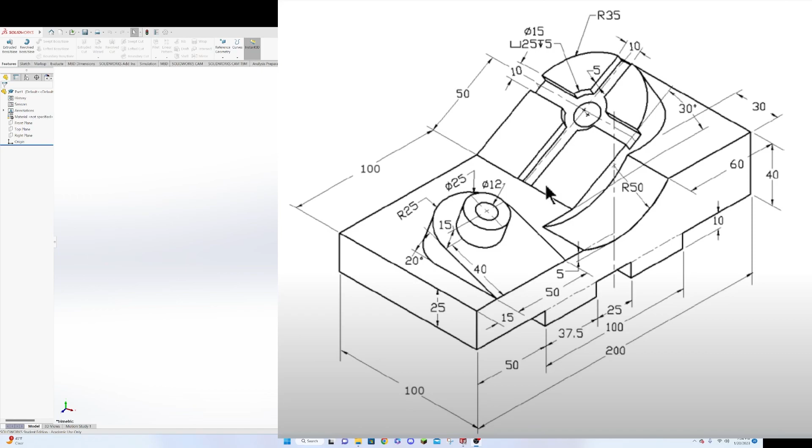What we will do here is draw this profile you can see on the side, and extrude the piece out to 100 millimeters. I'll shrink this down so you guys can see the SolidWorks, but leave it open on the screen so we can see the dimensions we're working on. I'll go to our right plane here, go normal to it, and then start a new sketch.

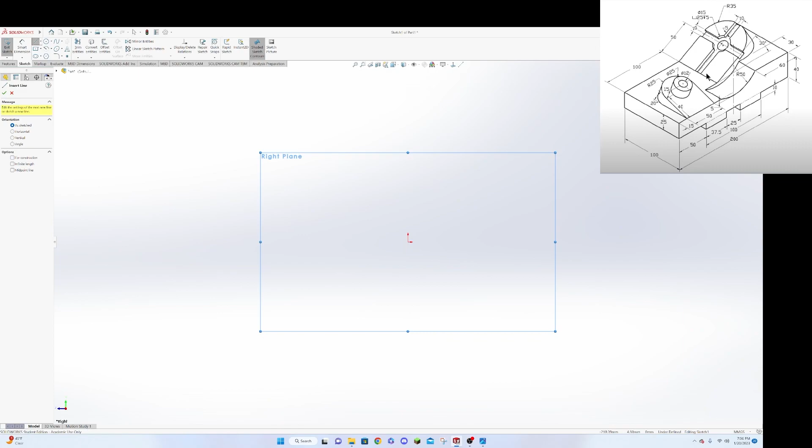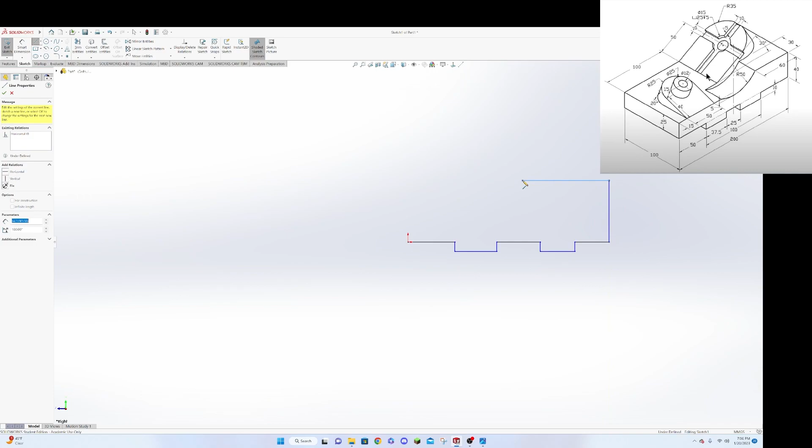We're going to use the line tool, and we'll just start in one of these corners here. If we look at our drawing, we have a total length of 200, and these little step downs here that are all the same height. So we'll start on the corner, draw over, drop down, over, up. Like I said, you don't have to be exact with this because we'll go in a second and give everything measurements. I'm going to go over to here, drop down at an angle here, come over. Make sure everything runs on horizontal and vertical lines so you're getting the indicators there - that will help you get a rough start of what you're looking at. Okay, so we've got that started.

So now let's go into our smart dimensions and start throwing some measurements on there. There's a few things we can do before that though. We can look at this drawing and see that each of these small legs is the same height - they're all 10 millimeters. And we can also see that all these lines, like the base of the object, are on the same plane, and the base of the two legs are all on the same plane.

So let's start by selecting these four little short legs. You've got to be careful here that you're selecting the lines and not the points, because if you select the points it will cause problems. Then we can click equal, and that makes all of those equal. So that's a good thing to start with. All right, so we've got that relationship going. We'll say okay, and then we can click this line here and hold Control and click that line there, and we have them horizontal - they're actually already horizontal to each other by default.

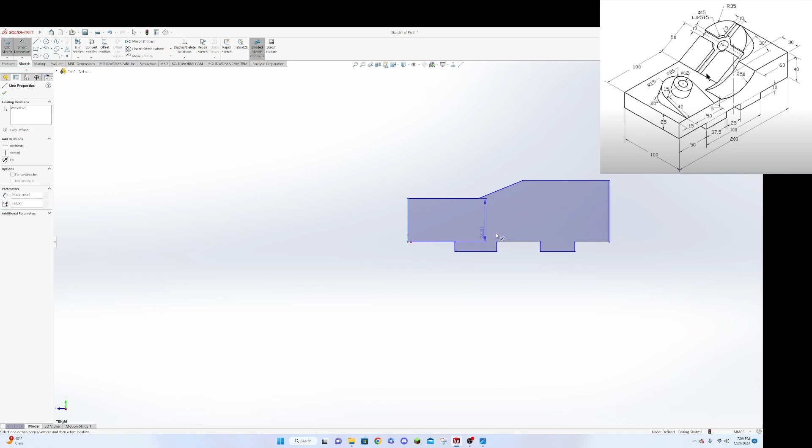I'm going to click on this line here, click on this line here, drop down, and say 200 millimeters. Then we can see that stretches us out, and it should give us a good representation now that we've changed this to 200, that everything else will kind of fall into its rough shape. We didn't draw everything exact, like I said, but things should be close now.

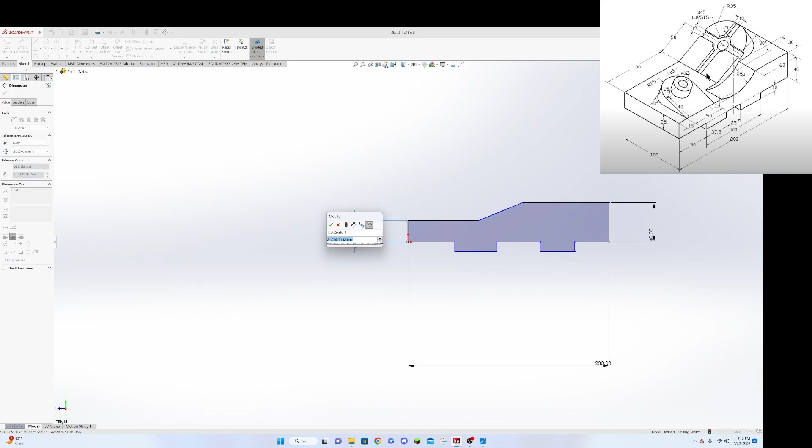So we have a height here of 40 millimeters, and we have a height here of 25 millimeters. Okay, so that gets us a little bit closer to where we need to be. We can see that this distance here is 100, and this distance here is 60.

All right, so that automatically creates this angle up here and gives us our top part done now. So now we have some distances on the bottom. This first one here is going to be 50. We know that the width of this piece is 37.5, so we say 37.5. And we know that the distance between these two pieces is 25.

And so then finally, we know that this one's going to be 37.5 just by doing the math on these. But what we'll do is use the measurement we're given, that from this line to this line we have 100. So we'll click on this line, click on the line there, drop down, and it's 100.

All right, so the only thing we're missing now, and the reason why this line is blue, is that we're missing our height for these legs. If we look at the drawing, we see the height for those legs is 10.

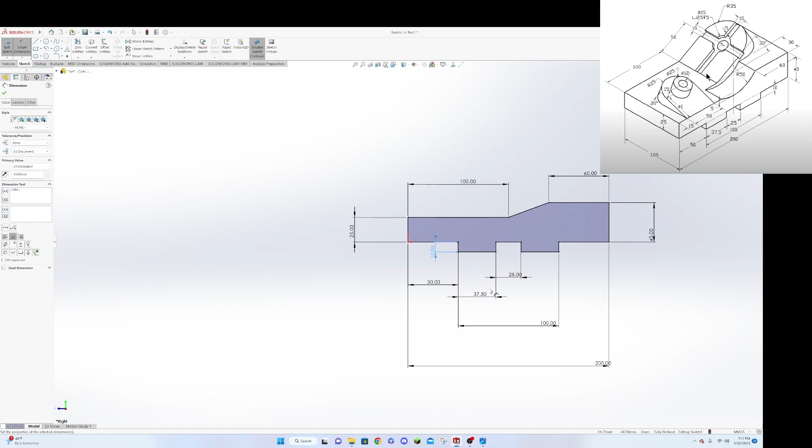Click on that, we say 10, we say okay, and you see that I did it for all of these lines because we told them that they're all equal. So there we go, now this is fully defined, it's all black lines all the way around, and we have our gray square. We can say okay.

Alright, now we want to go to features, we want to say extrude boss base, and let's flip it around so that we're extruding it backwards from this plane. Part of the reason why we're doing that is that you can see up here on the drawing that you have this cutout that comes off that face, this weird little cutout here.

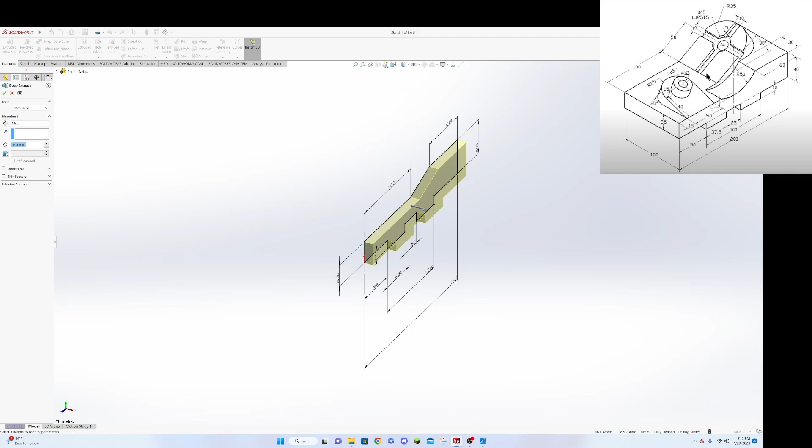So when we get to the point of doing this cutout, it will be easier if the object is running this way, away from the plane that we're going to draw on, because then we can draw this cutout onto this plane and just extrude cut backwards, versus trying to draw off of the face instead. We can just use the plane. So with that in mind, we're going to switch our direction that we're going to run.

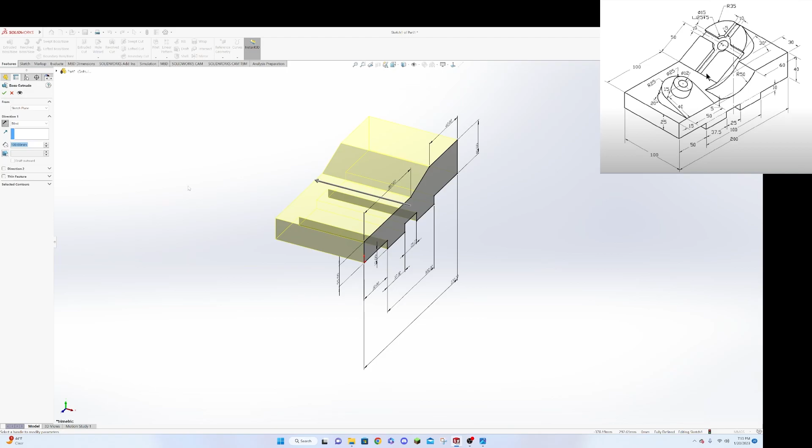So we click this button to flip it, and our width here we can see is 100, so now we're going to go to 100. Alrighty, so that gives us our rough shape here, and we can say okay. And you can see there we go, we have our rough shape.

So now that we've extruded this piece, the next step we'll do is the small angular piece on the skinnier part of the object, over here on the skinny part.

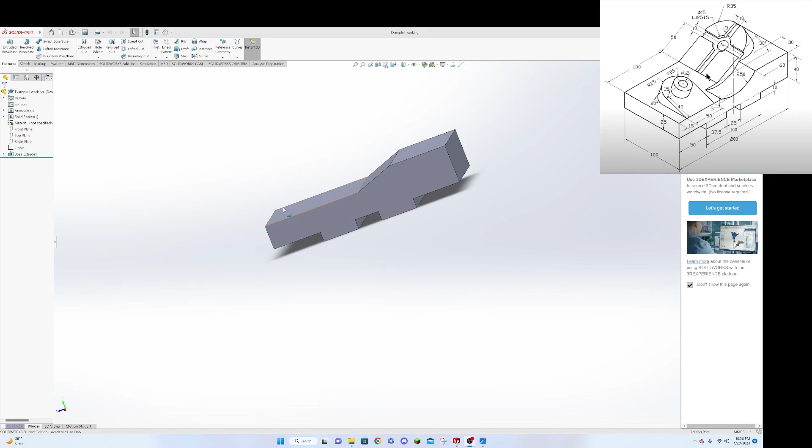So to do that, we need to make another plane here. We can look at the drawing and we can see that the face of that raised piece is at a 20-degree angle in relationship to this flat plane here, so to this plane here.

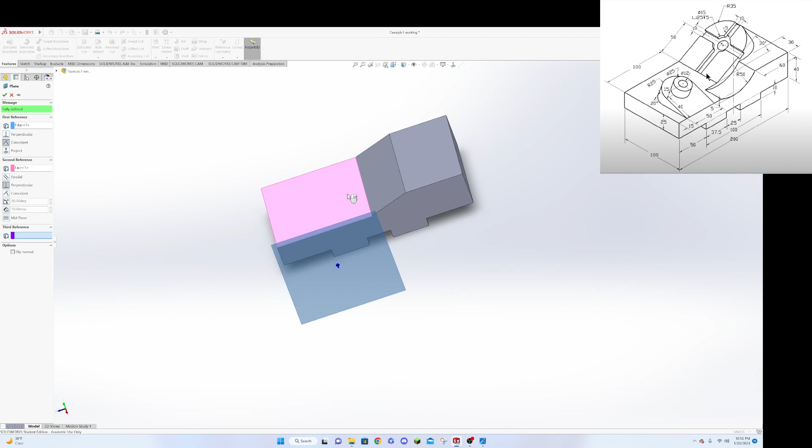So what we'll do is we'll go up and do reference geometry, click the drop down, choose plane. Now you're going to choose this edge as our edge to work off of, and then we're going to choose this as our reference plane. You can see what happens is you get kind of this new reference plane here.

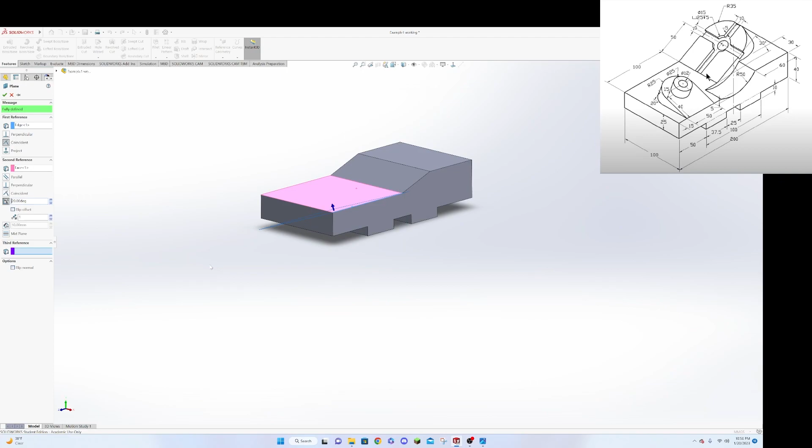Now what we want it to do is we want to make that at a 20-degree angle. So we'll click over here, and this brings up the degrees, and then we can type in 20. Now you can see that when we first do that, it gives us a 20-degree angle off of this face, but it's on the wrong side of the face. So we can flip offset, and that gives us a 20-degree angle now.

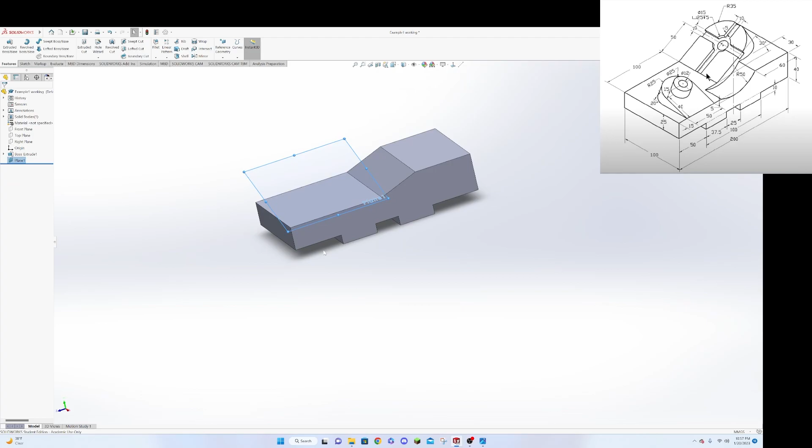And so now that will be our reference plane that we'll start our drawing with on here. So we say okay. Now we can go to that plane, right click on it and go normal to it, just like if it was any other plane. Right click on it again and start a new sketch.

So what we're going to do is draw the part of the extrusion that is the main base piece. So what we'll do is we'll get our line tool up here, and we will start on the surface here. One click.

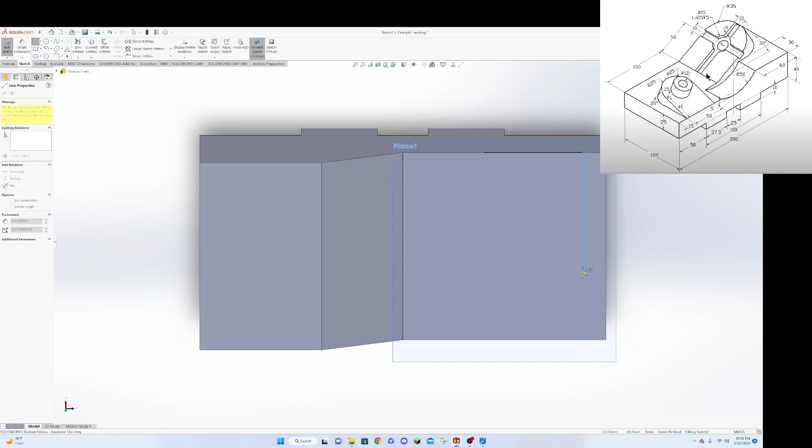Go over here, come up a ways, click, go away, and then come back to it. Remember, that gives us the arc tool, and it will let us know when we're lined up, right? We get those dotted lines that let us know we're lined up with both of those points. Click there, and then we can go forward and click up here, and we get our solid shaded area, which lets us know that's a piece that we can extrude.

Now we'll go to our smart dimensions, and we know that this distance here is 50. We know the distance from this line to this edge is 15. I've been having a thing where for whatever reason, my measurements are doing that weird scrolling thing.

All right, and then we know that our top radius, even though it should have that defined, actually I know what we're doing here. We need to define this distance. So the distance of this straight arm is 40.

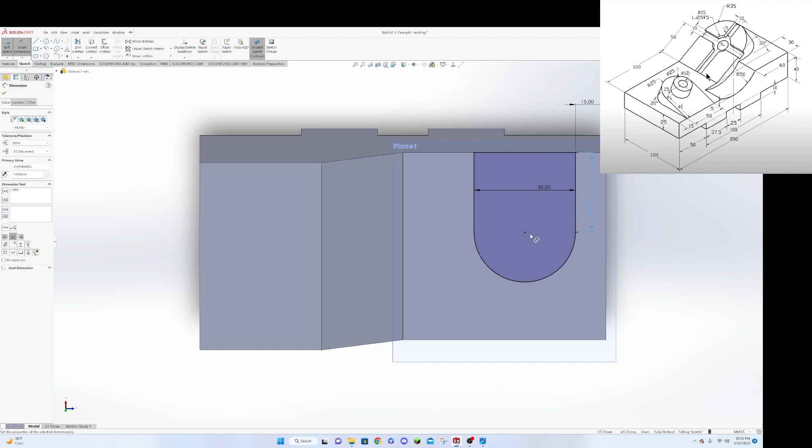All right, so now we have full black lines all the way around, so we know that we're fully defined. So what we can do now is click the check mark, and we can scroll this around. We've seen that it's not filled in, it's just drawn on this plane, right?

So we can go to Features and Extrude Boss Base, and we'll roll back around. You can see now we're extruding up in this direction. We don't want to extrude in that direction. We want to flip our direction, and we want to extrude down, up, basically up to surface. So we can say that here, and it's going to go in that direction until it hits the surface, and we say OK.

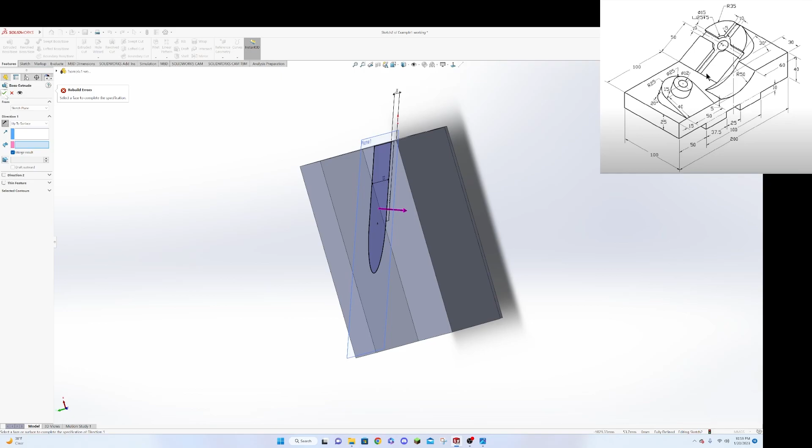Oh, we got to rebuild there. Oh, you need to pick the surface. Sorry. There you go. And now it fills it in. It shows that it's doing it. And then we say OK.

All right, so on this plane here, what we want to do is we're going to have two cuts. So we're going to have the pillar that we build up, and then we have the hole that we extrude out through it. We're just going to do it in 2 steps. It makes it a little easier.

So what we'll do is we have our sketch open here. We're going to draw our first circle. And it's got a diameter of 25, so we know its radius is 12.5. We say OK.

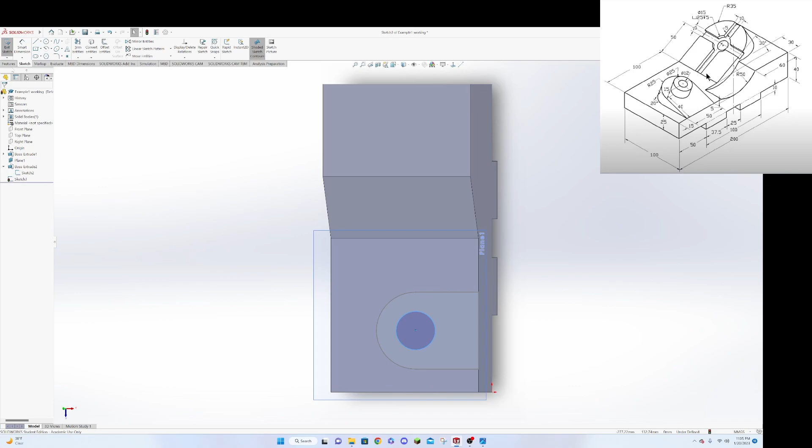And then we can go to Features and Extrude Boss Base. And we know that we want this to be 15. So we put 15 and say OK. And there we go.

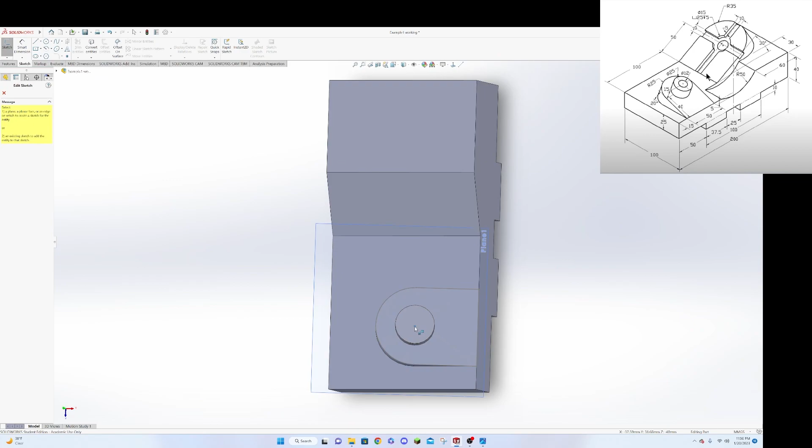And then we can go here and we can go to Sketch. We go here and we go New Sketch. And we can draw our circle here. Pull it out. And we see that our diameter is 12, so we'll make that 6. Say OK.

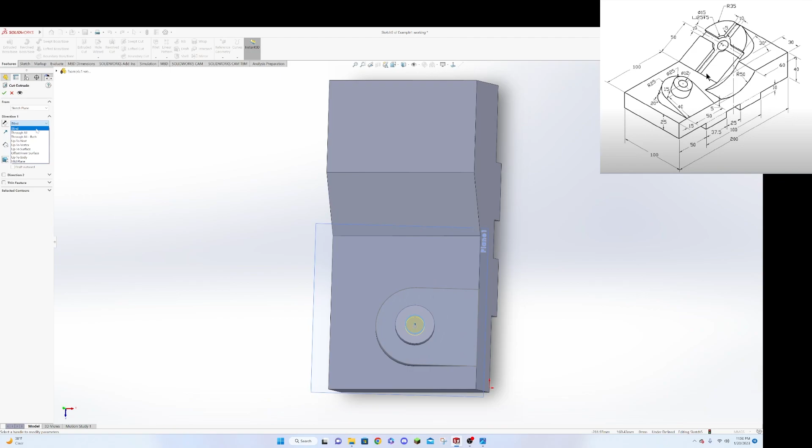And say OK. And we'll go to Features. And we'll do an extruded cut. And we want to go through all. And we say OK. And there we go. And you can see it punched a hole all the way through at that angle.

All right. So there's that piece. So now we've got this other piece over here. And part of this other piece on this side is going to be similar. We'll have to create a plane and work our way through that one.

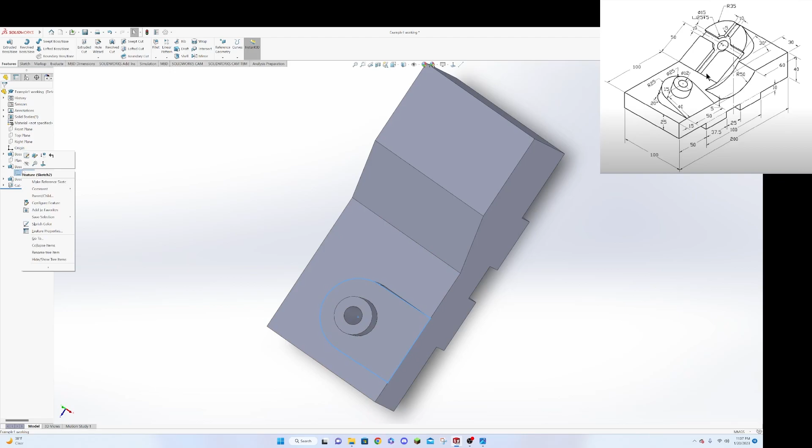So one of the first things we can do is we can go up here to this plane and we can hide it. And then also we had some of these sketches show as well. We can go back and we can hide those so that they're not in the way. It keeps the drawing a little cleaner.

So to create this plane here that we're going to draw on, you can see in the drawing that that plane is 30 degrees off of this flat surface. But it would be if this surface was carried through. So we have 180 degrees for the full flat, right? So if we know if it's 30 degrees off of this side, it's 150 degrees off of this side. And that's the angle that we'll end up using.

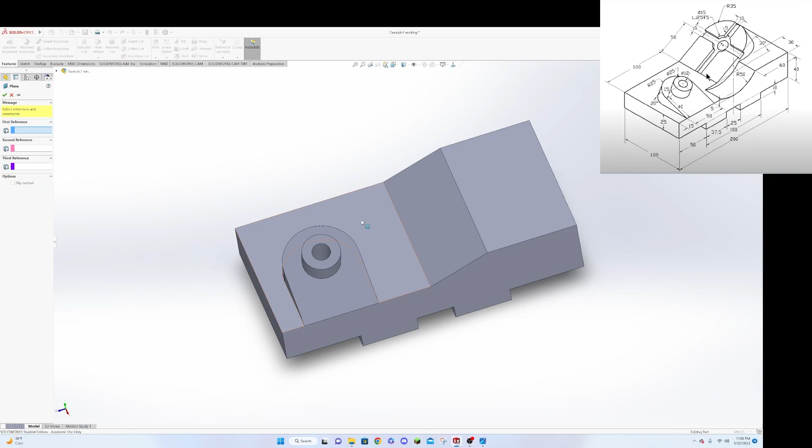So once again, we can go up and we can go to our sketch pad. Nope, features pad, sorry. Do reference geometry, do a plane. We're going to pick this line again as our first line. And then we're going to pick this plane as our reference plane, okay? And then you can click on angle. And we will choose 150.

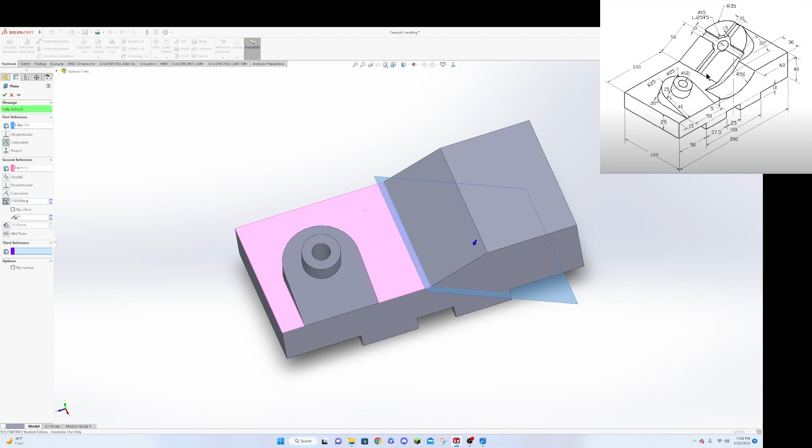And once again, we're coming 150 off of the plane on the bottom side here. So we'll need to flip that. So we flip our offset. And there you go. And now you can see that this has created that plane.

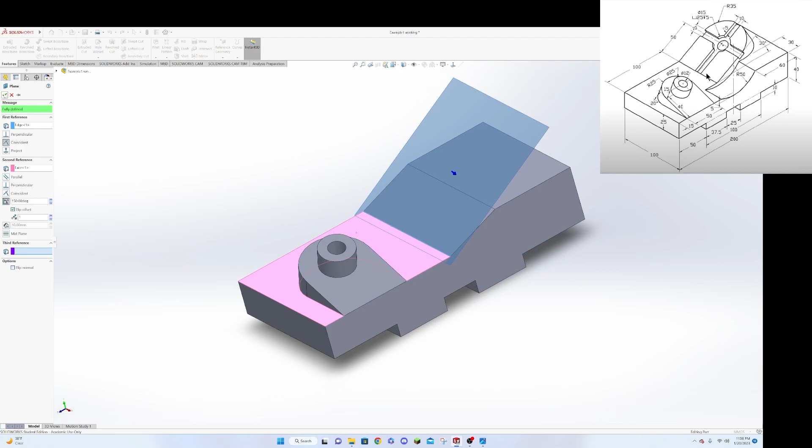It is 150 degrees from this pink plane over to the blue, which means that if you were to stretch this pink plane flat through, it'd be 30 degrees right here. And that's what the call out is for. So we say okay, and then we go about drawing our shape again.

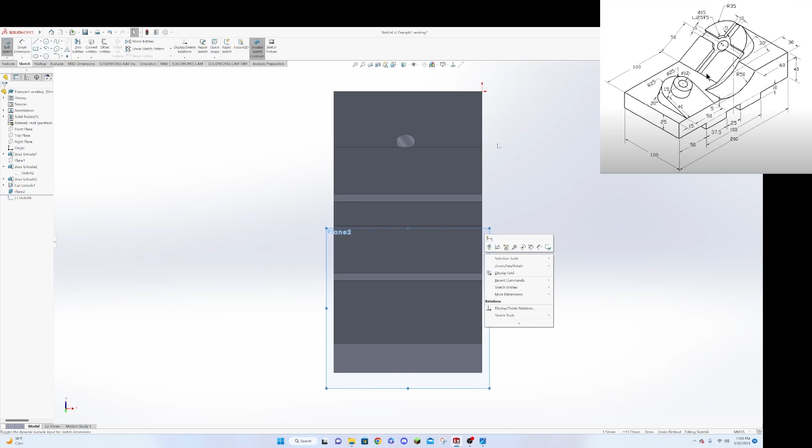And so over here on this side, we can go to this plane. We'll go normal to it and see it flips it. And so we're on the bottom side of that, and that's fine. We're actually going to go and we're gonna start a sketch, and we're going to be on that bottom side again. But if you come up here and you hit the normal to, or you right click and you go normal to, we don't have that normal to there, so we'll go use that normal to there, and it will flip us around. And so now we're on the right side of this that we want to draw off of.

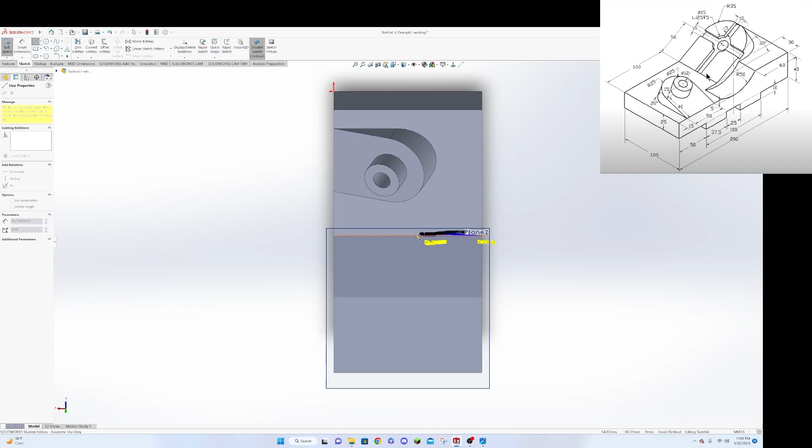So we'll go to our line tool again, and we can go here and click, stretch across. Like I said, I'm having this weird thing, so this is going to look a little goofy, and I apologize for that.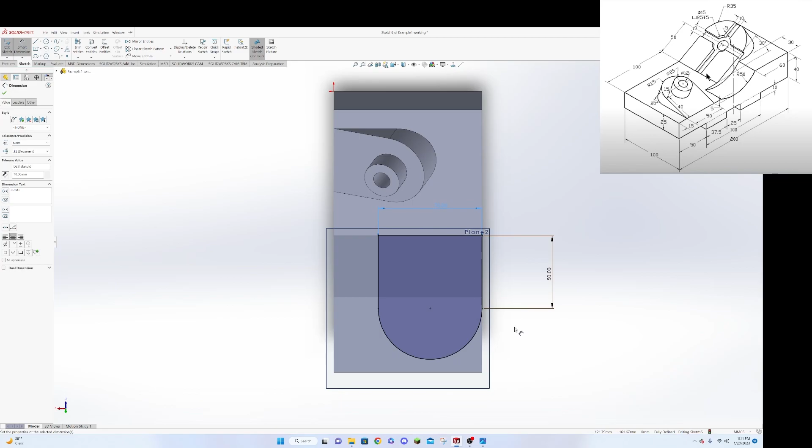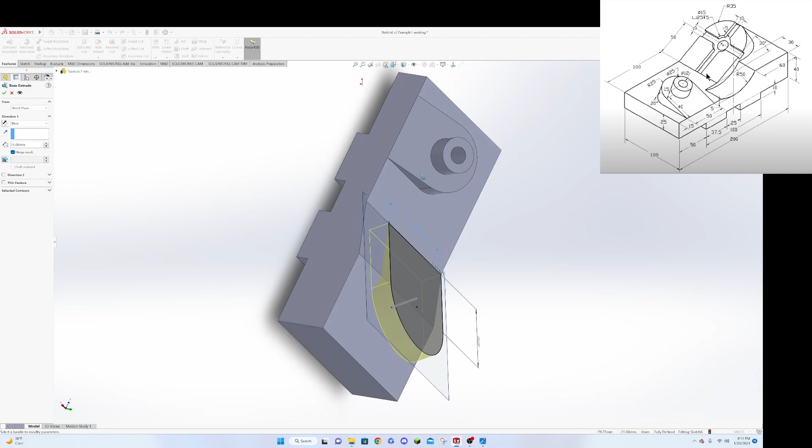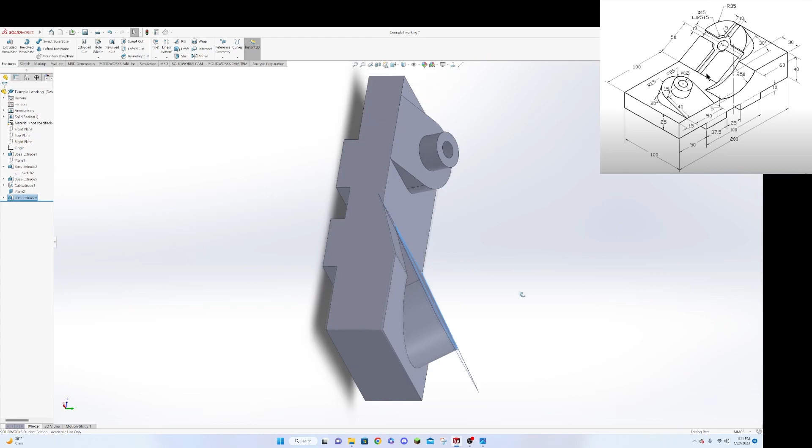So you can see here we're suspended over the piece, and before when we extruded this down to this plane, in this case we actually have two planes that we're going to extrude to. So if we go to feature, we do extruded boss base. Again, it flips us around because it's trying to be annoying. But we can see here that it's not going to go all the way down. What we'll want to do is, instead of doing blind, we click this drop down. Before where we did up to surface, that wouldn't work because we have two surfaces. So we can go up to next, which will work, or we could go up to body. If you do up to body, you have to select the body, but this whole piece is considered a body, and then it would wrap around. But up to next in this case will work. We say okay, and here we go. Now we've got that part of our shape.

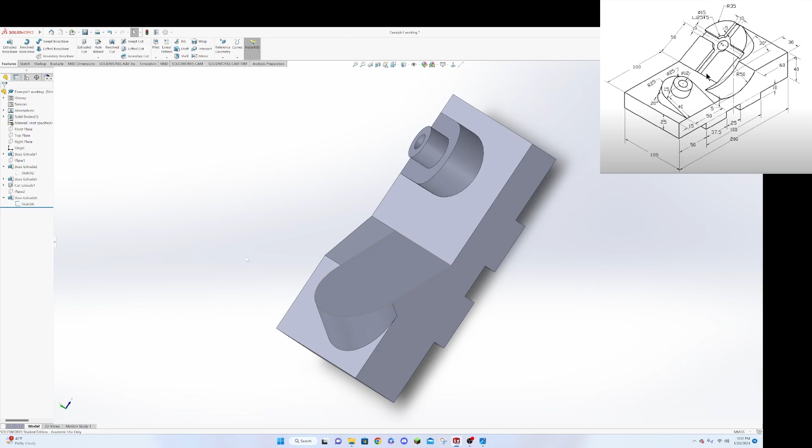Now we have to go draw the cross that's on the design with the circles in the center. To do that, I think we're going to hide this plane, but I'm going to go to our boss extrude and show the sketch. The reason is I want to have that reference point in the middle. So now if we go normal to that face and start a sketch, we're sketching off of this face. We have a hole that goes all the way through, and then we have this kind of cross pattern with the circle on the inside of it. This can be drawn in two different ways. We're going to do the cross pattern with the circle inside of it first, so we'll end up doing a few steps here to draw this. We'll draw our circle first.

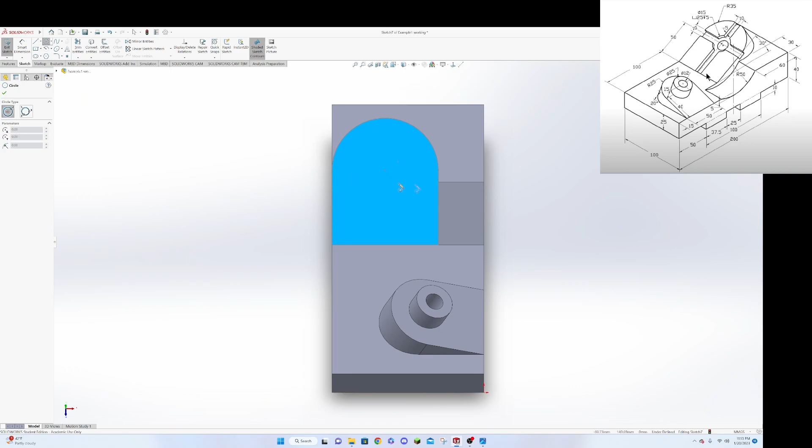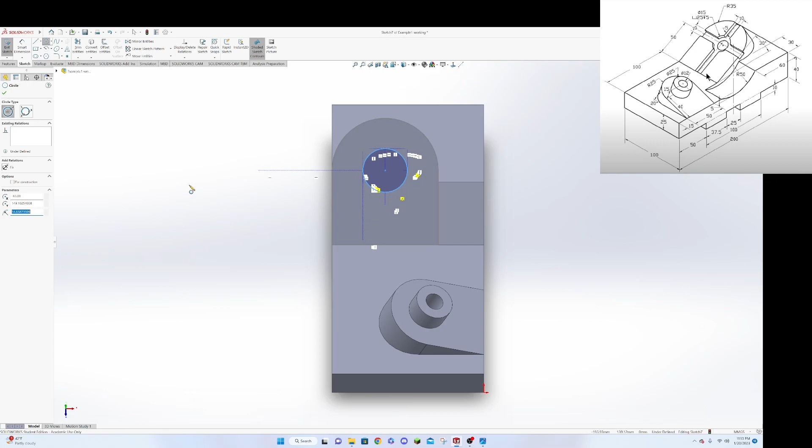Here's our circle, and if we look up there, it's a little hard to tell on this, but there's the diameter, and you basically get two diameters. On the drawing, if you look up here where you can see where the corner's at, you have this call out that says it's got a diameter of 15, and below that it says 25 sunk down at 5. That gives us our information: the outer circle is going to be 25 for a diameter, and the inner circle will be 15. So what we'll do here is we have our radius, and we'll make that 12.5 because we know our diameter is 25. We say okay, and we say okay on that.

Now there's a few ways you could draw your X. I'm going to do mine using the center point rectangles. I think it works all right, so go up and click save, and maybe that will hopefully make this run a little smoother without all the artifacts we're getting right now.

So no, we're still going to get the artifacts. So we're going to do a center point rectangle. I'm going to bring it down and click it on this edge, so now we're referencing this bottom edge. We'll say okay, and then draw another one, referencing this edge here. We'll say okay.

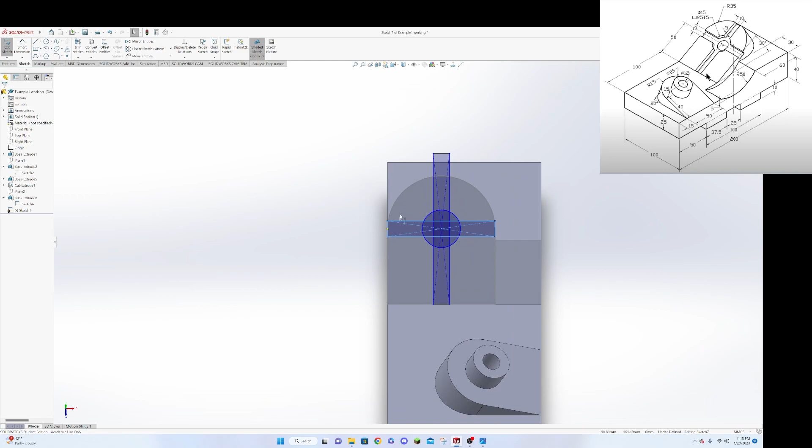I'm going to zoom in to show you why I did this bottom edge, because you have the curve coming off here, and on that piece we're going to want to cut down. I wanted to make sure I wasn't referencing part of this curve's edge while pulling over, because then we'd miss part of the cut. If I go out to this furthest edge of the cut, we'll cut straight down.

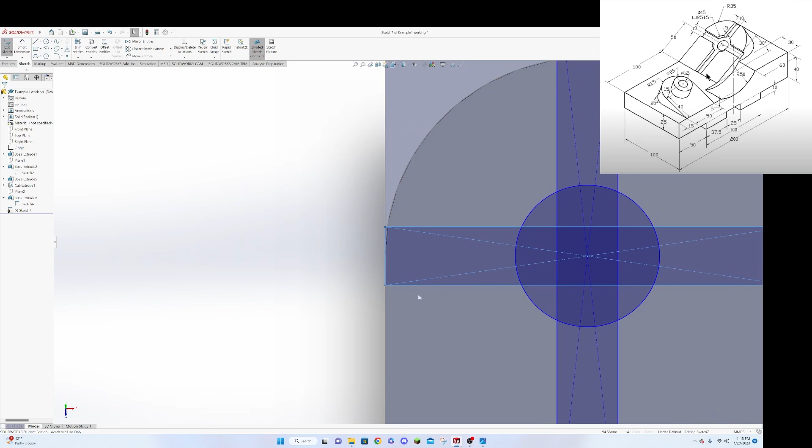So we've got these two here, our cuts overlapping where we need to cut down, so it will be all right. Then we want to go into our smart dimensions and tell this to be 10. Since we did a center point rectangle, it's adjusting side to side from both sides in, so it's still centered around that point, which is what we want. Then we'll pull this off here and call that 10 as well. Now we've got that defined there.

We'll say okay. I don't know why, but this circle should be defined for our radius, and I'm not seeing it. It says 25, there we go. Oh, I know why - it's because we put in the dimensions when we were creating it, and until you actually do a defined dimension after the fact with the Smart Dimensions tool, it doesn't show as defined.

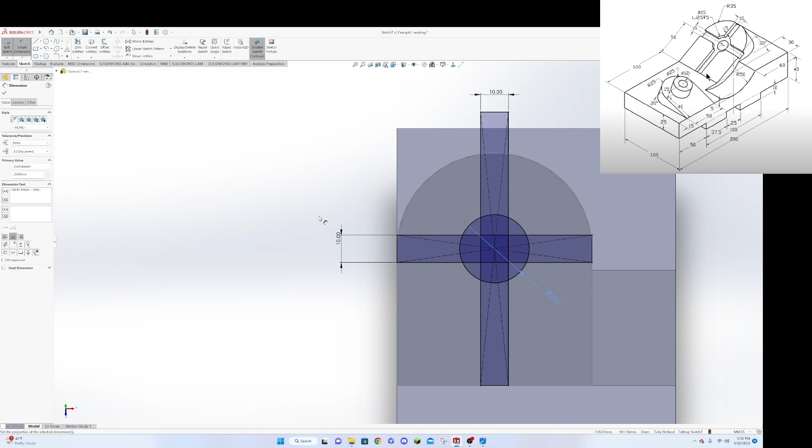So now we're going to do a cut on this, and if we were trying to do a cut right now, there's a ton of different parts to this. So to clean all that up, we're going to go up and pick our trimming tool. We'll say okay to our dimensions, come up here and click trim entities. We're on the power trim right now, which is what we want. Basically we're going to come through here, and you have all these cross lines - there's a lot of stuff in here to come through and get rid of.

Your dimension lines aren't going to be deleted by that, which is fine - we don't want them to be. But you're basically going to go through with the power trim tool and trim all of these pieces out, including those two. It's kind of a mess, but it works.

Now when we do that, we see we get one solid piece here. I think we power trimmed those - that's just the drawing showing up still.

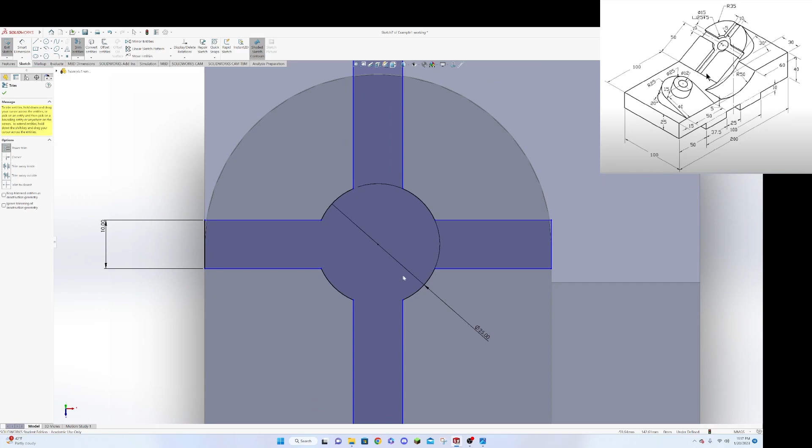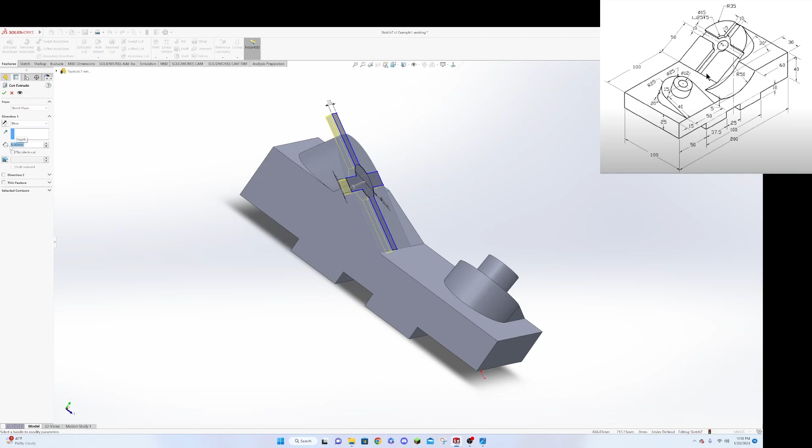So now we've got this part done, so we can say okay and go to features again, and do an extruded cut. When we tip this around, you can see our extruded cut right now is going down 15. It only needs to go down 5. So we'll go here and say 5, and we'll say okay. And there you go - you can see it's now cut that design out.

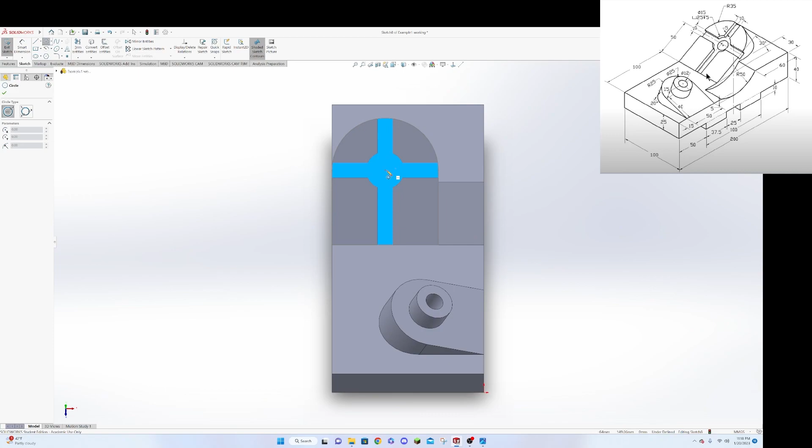So now if we go into this face here, we do sketch. We're lined up, and we still have our point here because we've got that line visible. This is really simple - now all we have to do is draw in a circle and give it a radius of 2.5, because its diameter is 5.

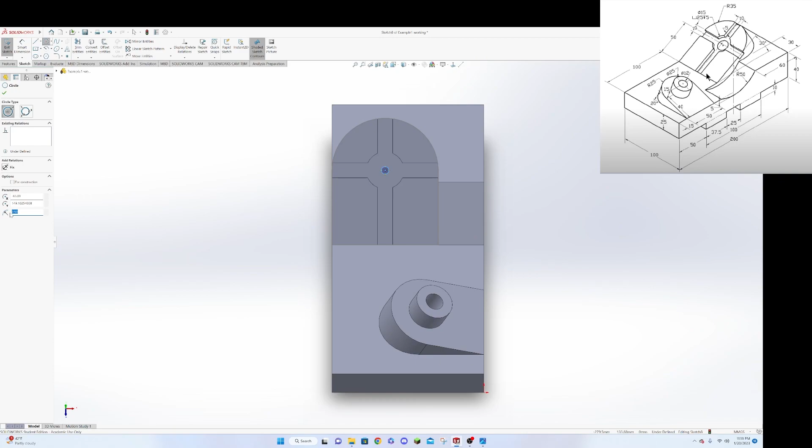Oh no, never mind, I was reading that wrong. Our diameter, this outside one was 25. The one for this one is supposed to be 15, so our radius is 7.5.

So 7.5, say okay. We go to features, we'll do an extruded cut, and we'll do through all, and say okay. Now you can see that cut that hole all the way through.

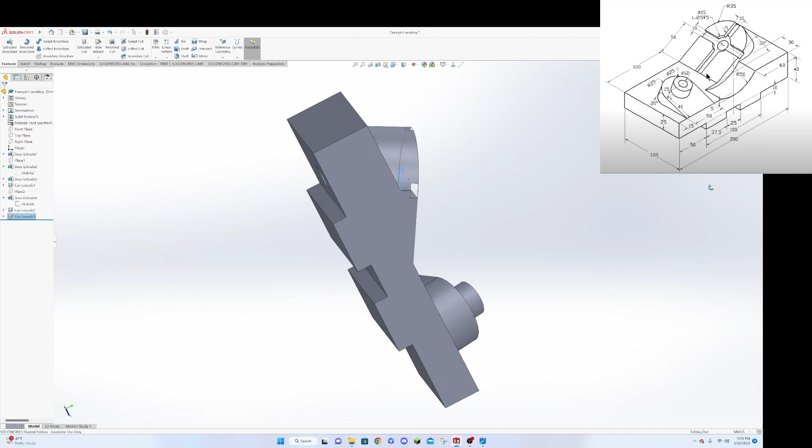So now we can go in and start hiding a few things again. Remember we made this sketch visible - we'll hide that again, and we already hid both of our planes, so we're looking a little cleaner there.

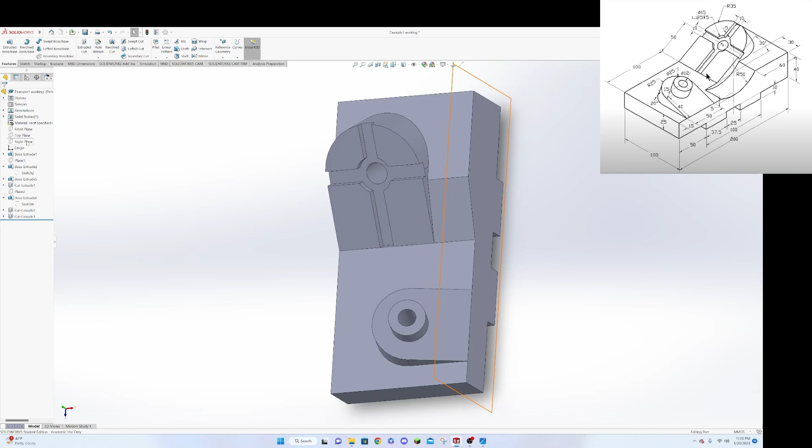So the last thing we have is this little dished out piece right here. This is why I said when we were starting, you want to pay attention and draw it on that right-hand plane. Because now we can go over here, right-click on the plane, and say normal to - it flips us around, right, and that plane is on that face. So I'm going to go back to being normal to that plane again, and we're going to sketch there.

And so all we're going to do is sketch a circle - we're just going to come up here.

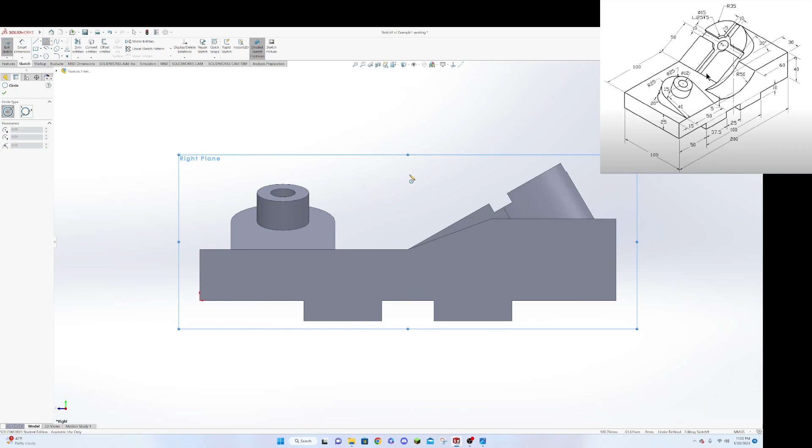We know it's going to be roughly in this area, so I'm just going to sketch a circle here. We'll say okay, go to smart dimensions, grab onto it, and pull off of here. You can see on the drawing that it's got a radius of 50, so its diameter is 100. So we want to give it a diameter of 100.

Now you're looking at that and thinking, all right, we're cutting into way too much stuff, right? So then we have to look at some of the other information we get here. We know that the depth from this line to this edge, so the bottom of this line to this edge, is going to be 5 millimeters.

And this one's a little tricky on the drawing to know for sure - it's the one measurement that's a little iffy on whether it's fully defined. But we're going to say that this point here, where we go up on the angle, and this point here are in a vertical alignment. So we'll click here, click on this point, push Control, click on that point there, and say vertical. That's going to shift us over a little bit here.

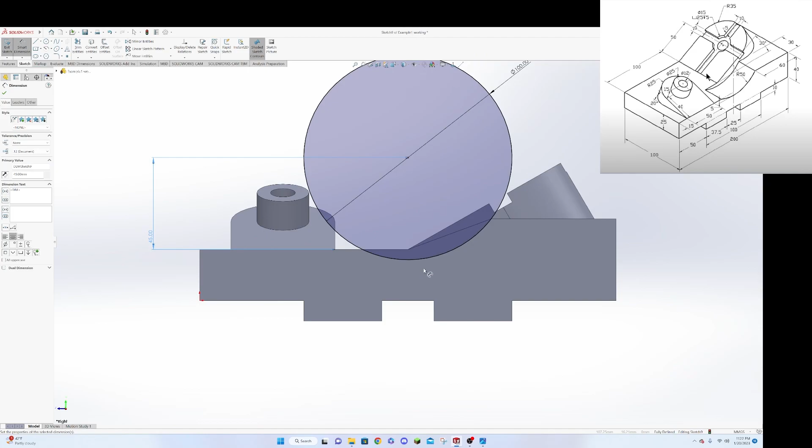So then we'll say okay, go to our smart dimensions, click on this point, click on this line, and pull over here, and say 45, right? So if we make this 45, then we know that the distance from this bottom part of this line up to that line there is 5. And so that gives us our cut.

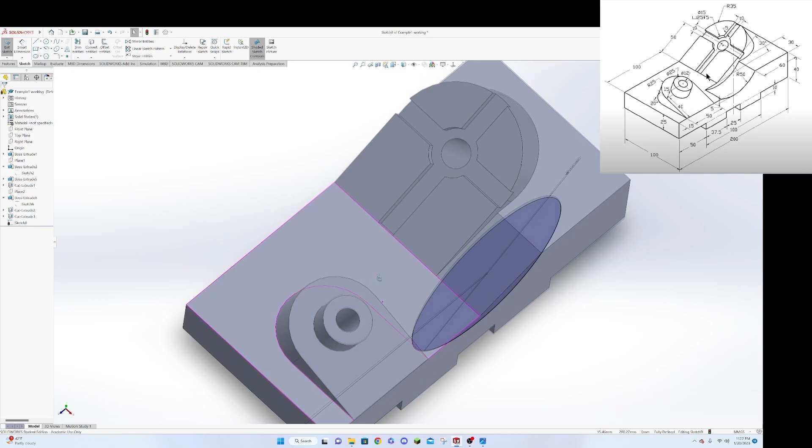Now, we can't just go ahead and do an extruded cut just yet, because if we extrude this cut back to this plane, it's going to nick into this face right here, right when it gets to it - that face is going to be high enough. You might make that mistake initially. When I first built this, I did that, and I noticed I had a nick there. So we're going to go back in and fix that.

To fix that, we're just going to take our line tool, go back normal to this circle. We're still inside that same sketch, and we're going to go down to our circle here. I'll click on the line, pull up vertical and click on the line, and then push escape.

That gives us this line in the middle here, and then we can go to trim entities and come over here and trim that off. We're just trimming off that edge of the circle because we don't need it. And we say okay.

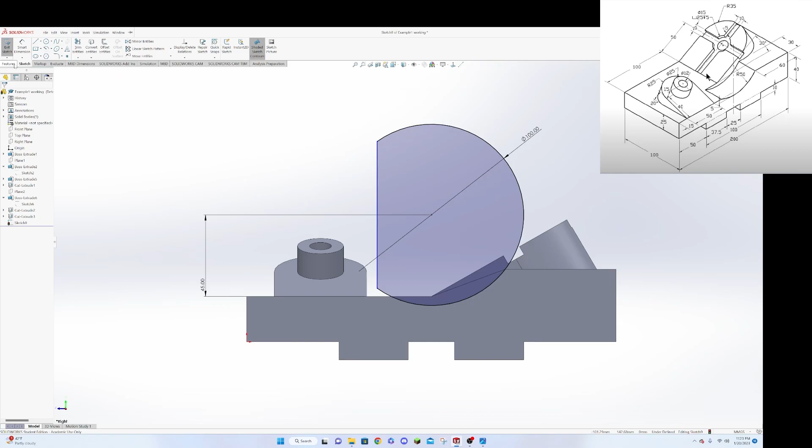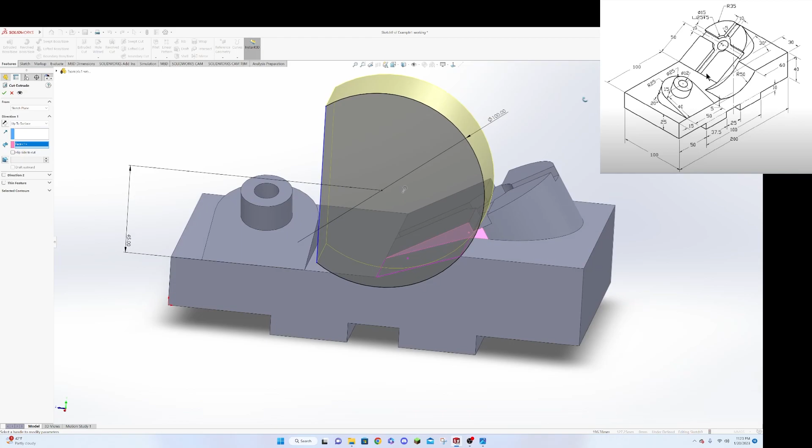Our final thing to finish up this object is we're going to go in here and say feature, extruded cut, and we're going to say up to surface. We'll flip around here so we can see a little bit, and choose this surface. You can see at that point it runs us through and cuts that piece out. And then we can say OK. And there we go.

So that's our finished object. You can see it's got the little dish in there, and we've got the cross there. Really the only thing that was not fully defined in the drawing, at least in my opinion, was the location for where the circle went.

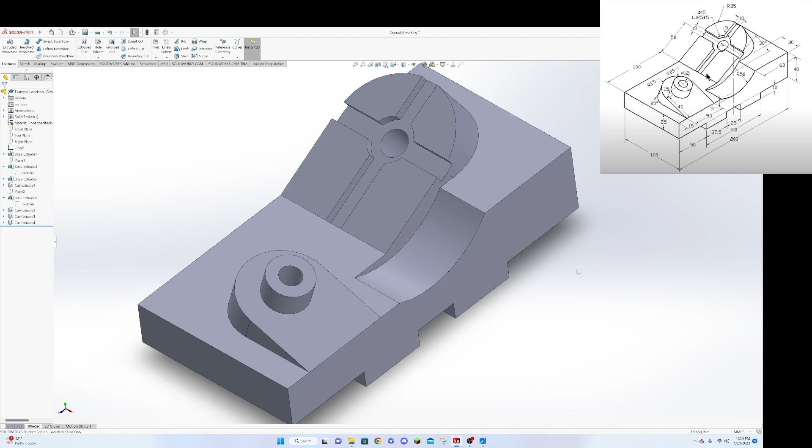But I think if you look at how it's drawn, it looks like it's centered with this piece here, and this piece here is centered with that line. I don't see where it's called out - it might be called out somewhere in there and I'm just missing it. So this is our finished object.

There's a few ways you can go about doing some of these things. You can do the pillar and the hole through all as one drawing. Same thing up here - you can do offset lines instead of centered rectangles. There's no real one way to do a lot of these things. There are different tools - it's what you're most comfortable with, and what you feel like you have time for. So go through this.